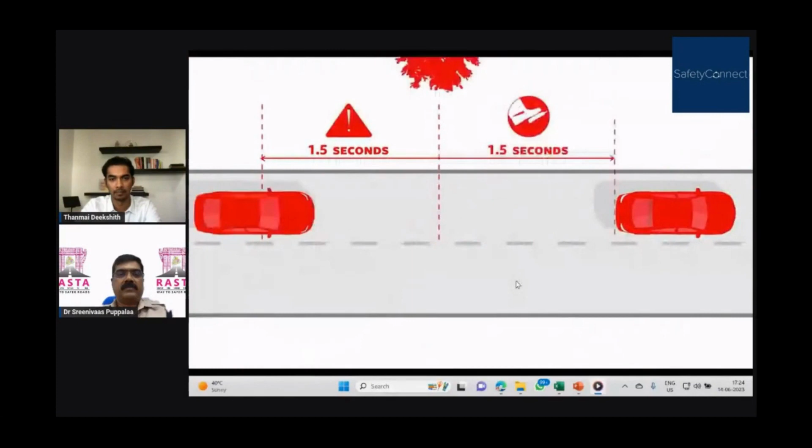It takes about 1.5 seconds to notice a potential risk in front of you, and another 1.5 seconds to react, hit the brakes, and slow down. So you want to give yourself at least 3 seconds between the car in front of you and your vehicle.

To measure, wait for the car ahead of you to pass a set object - a tree, road sign, light pole, any clear marker will do. After it passes, start counting: 1001, 1002, 1003. If you reach that same object before you reach 3, you're too close.

Of course, this 3-second baseline is right for a car in normal driving conditions. Driving in bad weather, add 1 more second. Driving an SUV, add another second. If you're driving a commercial vehicle, it's got to be at least 6 seconds. So don't forget the 3-second rule.

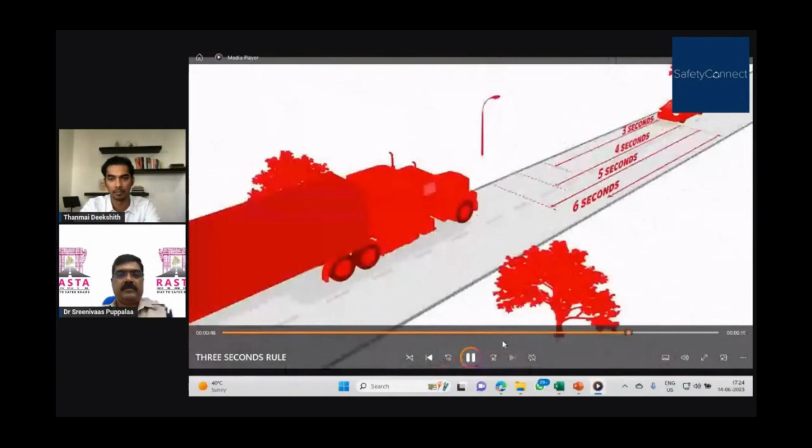Then safe distance. This is the most important slide in road safety. We have seen how to maintain the distance between the front vehicle and our vehicle, and in this you see how a driver has to concentrate on the driving.

Suppose you are driving a car at 100 kilometers per hour, and suddenly you see a person or pedestrian on the road. What comes into your mind? Just think. Somebody may think we need to apply the brake. Somebody might think we have to horn.

Not that. First, what comes to mind is that you have to stop the vehicle before him. But only when you are alert can you do that. First, what is your action? First you remove your foot from the accelerator and keep it on the brake. This takes 1 to 1.5 seconds for a normal person. It is called thinking time, and the distance traveled during this is called thinking distance.

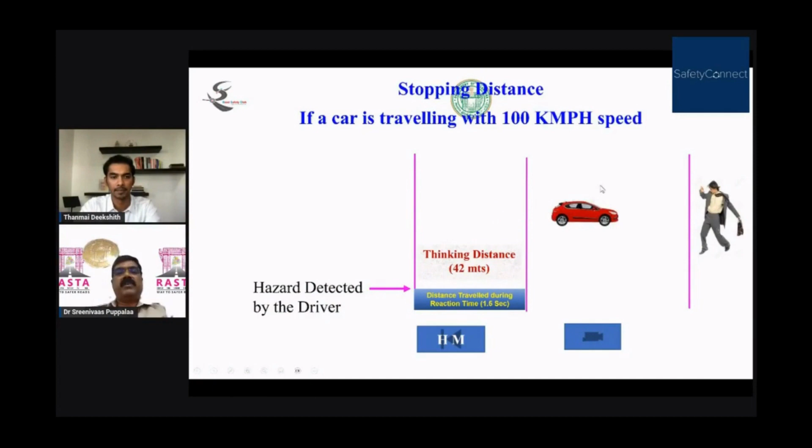Now you apply the brake. When you apply the brake, it won't stop suddenly, right? It travels some distance. That distance is called braking distance. At 100 kilometers per hour, it takes a minimum of 66 meters, as we also saw in the previous video.

That depends on the size of the vehicle, the road condition, and your brake condition. All these factors are considered. This is a normal car we have taken, assuming 100% braking efficiency and a normal tar road. So it needs around 108 meters distance to stop the vehicle without touching it.

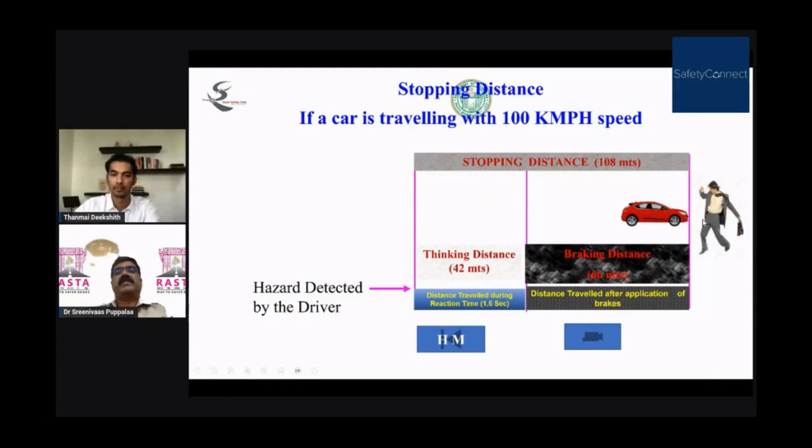We will see one video of what happens if suddenly a vehicle comes in front of a vehicle. Here you see suddenly this vehicle has come. There is no space to brake and stop this vehicle, right? So ultimately it has crushed the other vehicle that came in front of it suddenly. So that safe distance we have to observe.

In my opinion, there is no profession which needs this much attention. Can anybody tell if there is any profession that requires this much attention? Except driving, no other profession, because every fraction of a second the scene on the road changes. Some vehicle comes, some vehicle overtakes you, some pedestrian comes, sometimes an animal comes. Every second the scene changes.

We see how the behavior is on the roads.

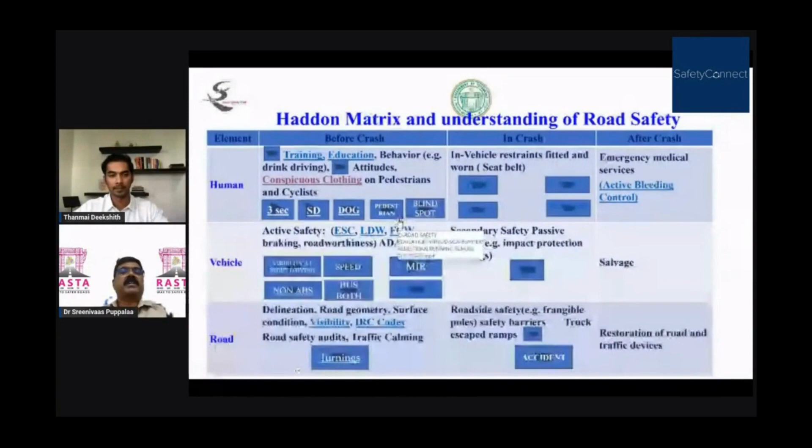Here, what we observed is the careless attitude of the pedestrian. As a defensive driver, when approaching a nearby village, town, or any place where pedestrians are supposed to cross or are moving around, he has to reduce speed and be ready to stop the vehicle. If he goes at a lesser speed, he can stop suddenly when needed.

So what you have to do is look over your shoulder for a fraction of a second. If you look over your shoulder, it will be visible. When you want to change lanes, give an indicator, wait for 5 seconds, then try to move slowly into the other lane after observing the side mirrors and over the shoulder. That is the safest way of changing lanes.

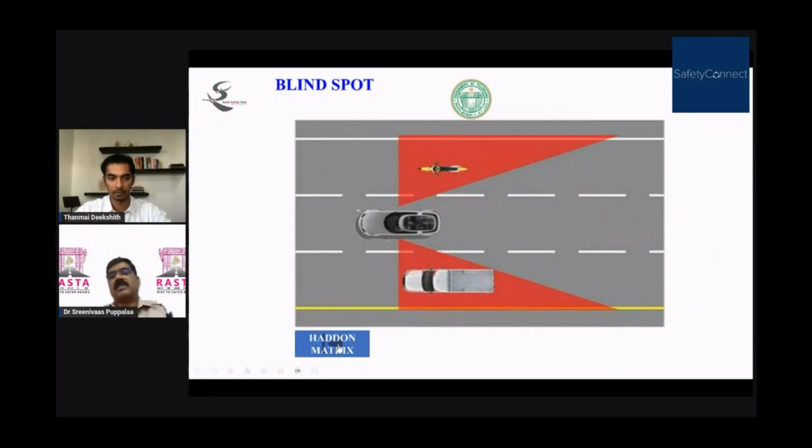These are the human sides. And vehicle side, ADAS, advanced driver assistance systems, which are helping to avoid the traffic crash. There are so many, right? Lane departure warning, then frontal collision warning, then electronic stability control.

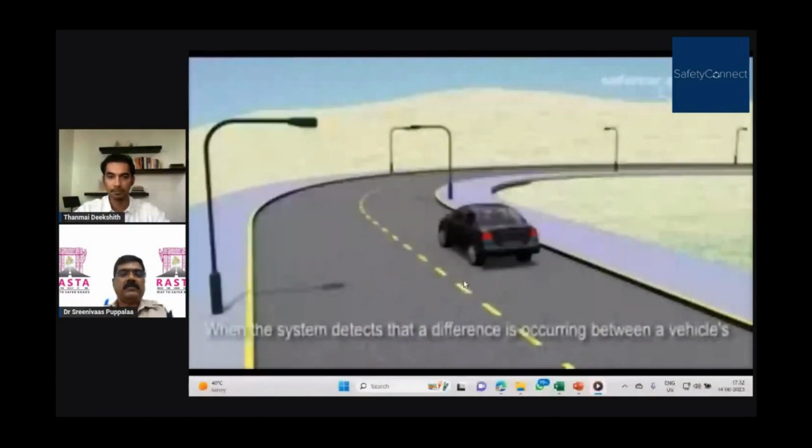These all help us. An electronic stability control system, commonly referred to as ESC, helps the driver maintain control of a vehicle during extreme maneuvers. When the system detects a difference occurring between a vehicle's motion and the driver's input, it activates preventative measures that keep the vehicle moving in the intended direction.

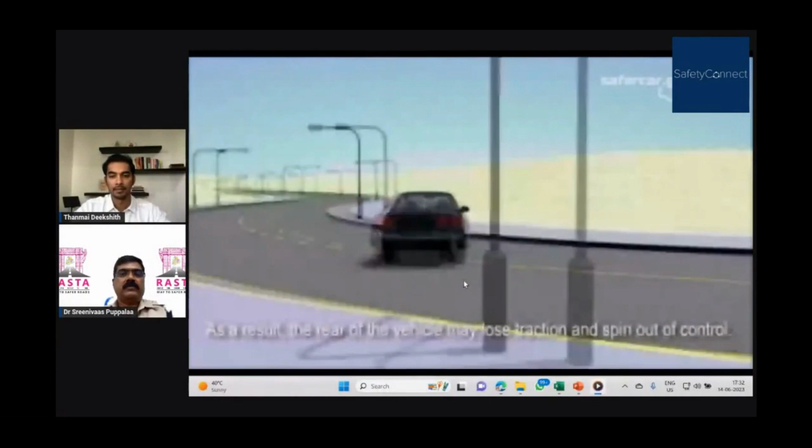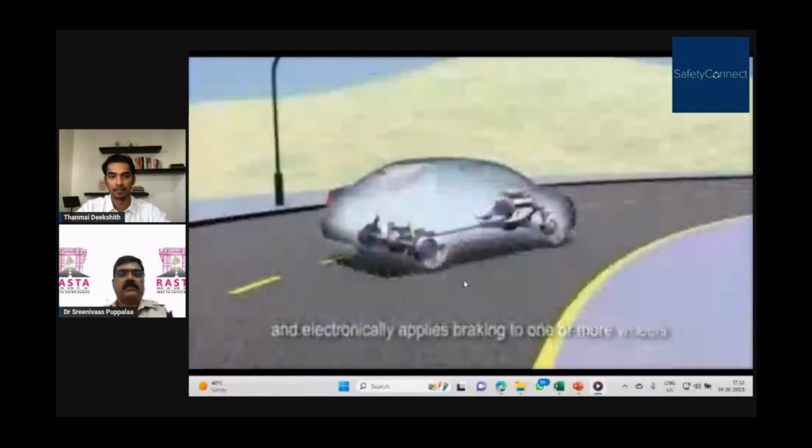Here's how it works. A spin-out occurs when a driver steers a vehicle too much in a direction for the speed of the vehicle. As a result, the rear of the vehicle may lose traction and spin out of control. Electronic stability control recognizes the problem and electronically applies braking to one or more wheels, in this case the outer front wheel, to counteract the oversteer.

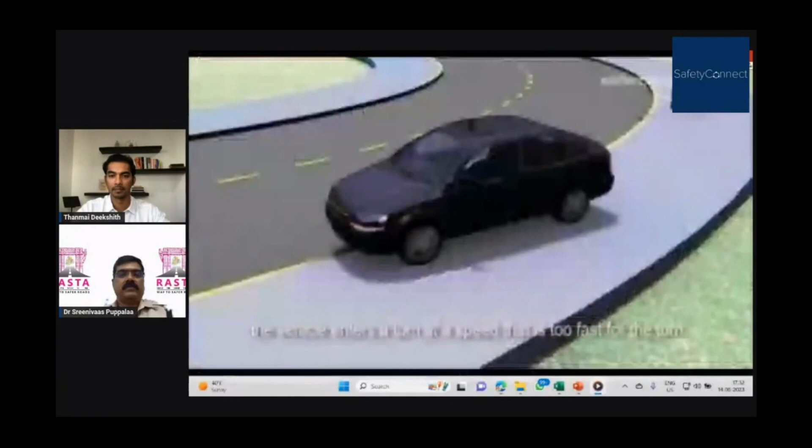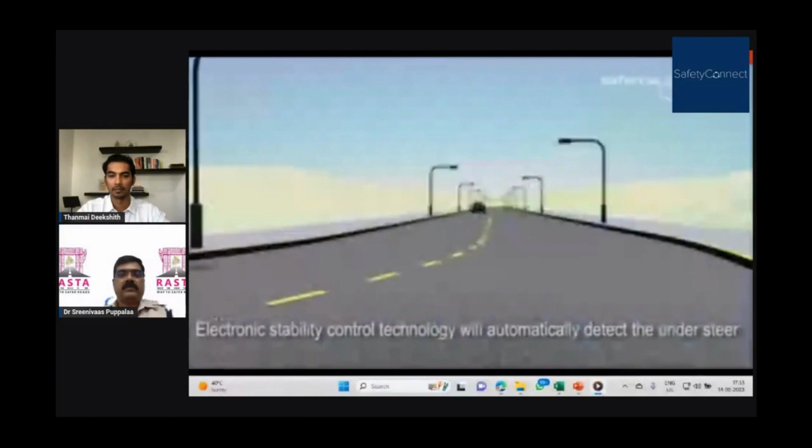During an understeering or plow-out event, the vehicle enters a turn at a speed too fast for the turn. This results in the vehicle losing traction and not being able to make the turn. Electronic stability control will automatically detect the understeer and apply braking to one or more wheels, in this case the rear wheel, to counteract it.

You might have observed understeer and oversteer here. Understeer means steering less than the amount required to negotiate the curve at the vehicle's speed, while oversteer means steering more than required. Both conditions are prone to road traffic crashes - you will go out of the road and lose control. To avoid that, electronic stability control will take care of it.

And similarly, lane departure warning: suppose you have fatigue and are feeling sleepy and the vehicle is going out of the lane, then automatically it will come back into the lane. And frontal collision warning: suppose you are going too close to the front vehicle, the brake will automatically get applied and the vehicle will slow down and maintain distance with the front vehicle.

All these features have come in the Mahindra XUV 700. I think most of you know it very well. Then ABS, anti-lock braking system.

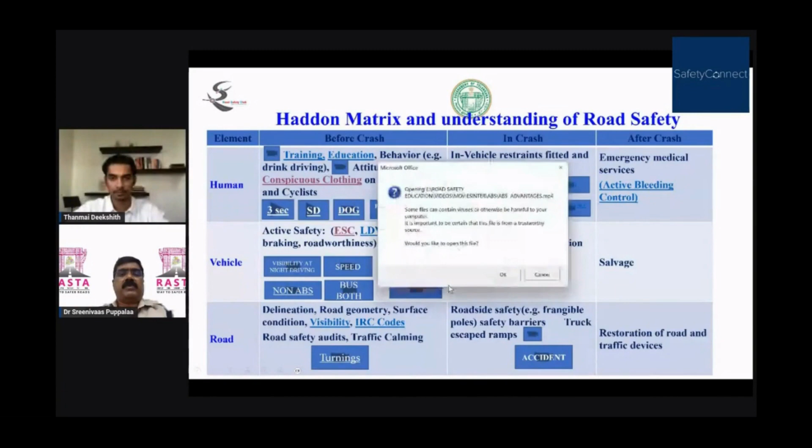How does it work? We'll see. Let's have a look at the ABS benefits in practice. Full braking at 100 kilometers per hour.

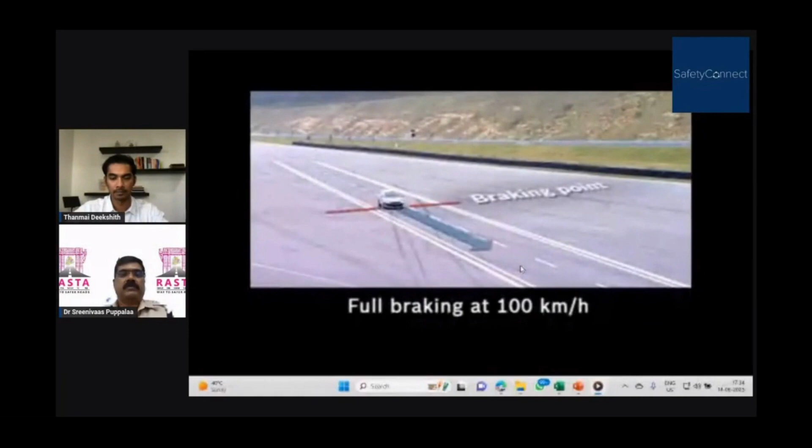You see, when you apply brake, suddenly the wheel gets locked completely, so there is no rotation. When there is no rotation of the wheels, front and back, the vehicle cannot be steered. When rotation is there, only then can the vehicle be steered in any direction.

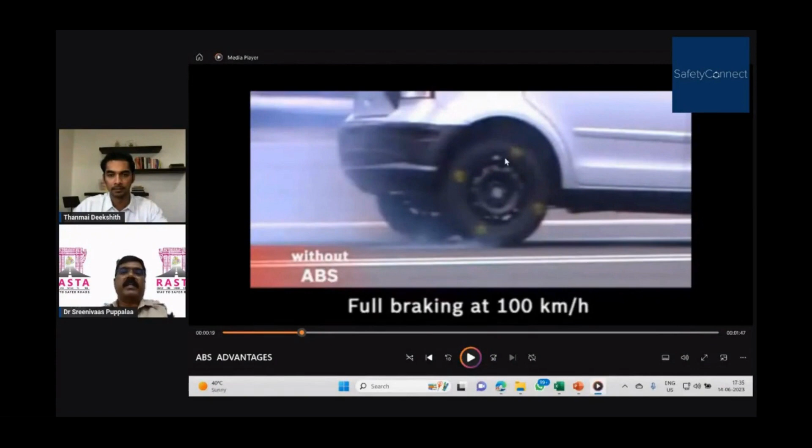So what happens is the anti-lock braking system senses the locking of the wheel and automatically releases the brakes so the wheels rotate and you can steer in the direction. That's the function of the anti-lock braking system. With ABS, the braking distance is significantly shorter and the vehicle remains stable.

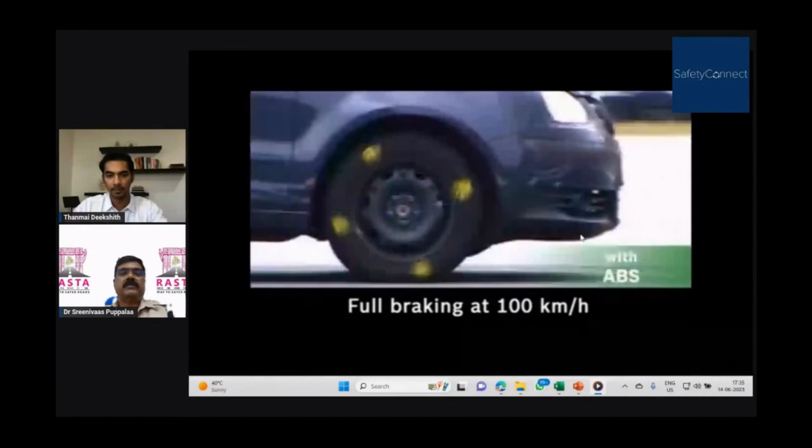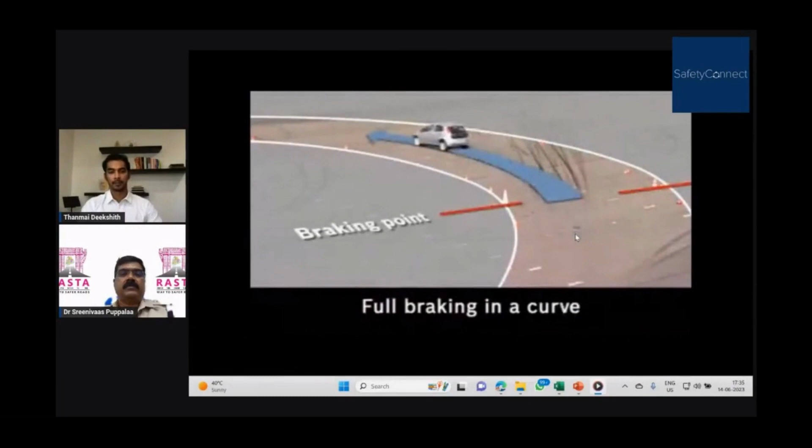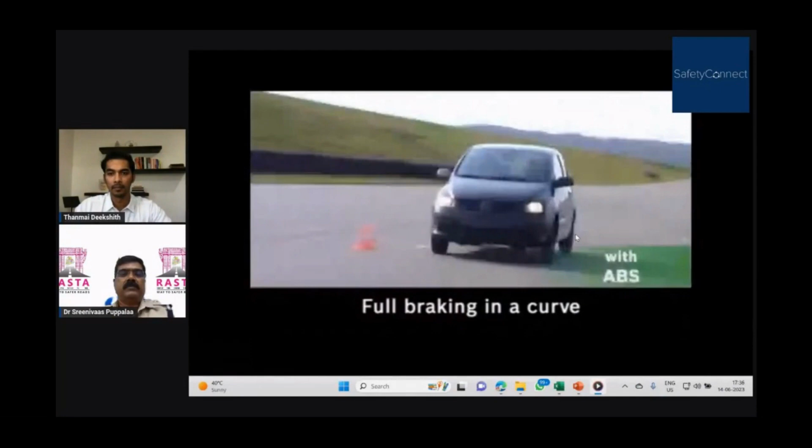Full braking in a curve. Without ABS, should the wheels lock while applying full brakes along a curve, the vehicle can no longer be steered and slips out of the curve. With ABS, you have the vehicle under control and can steer systematically.

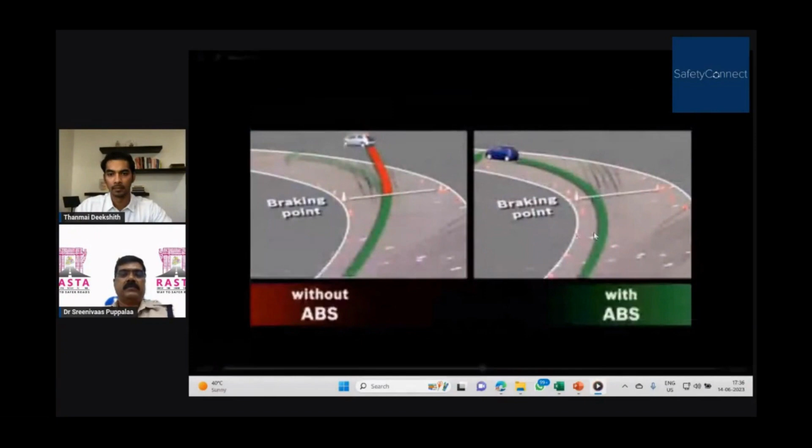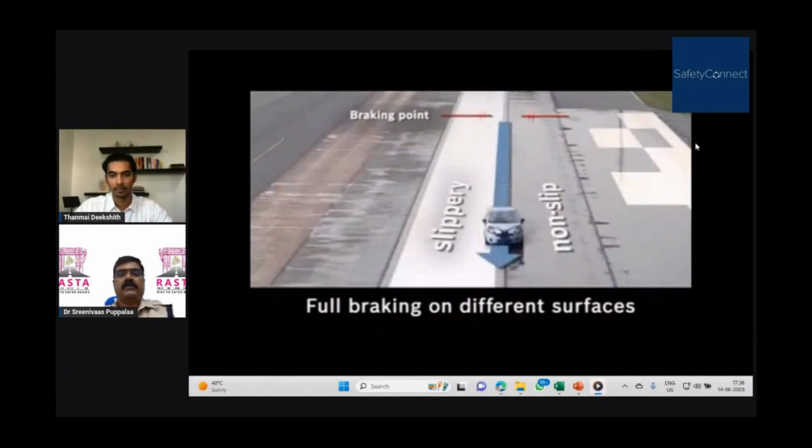Full braking on different surfaces. Traction on lanes may vary due to volatile weather, dirt, and foliage. When fully applying brakes without ABS, the vehicle can quickly become unstable. With ABS, the vehicle remains stable even in this situation, with an optimal braking distance.

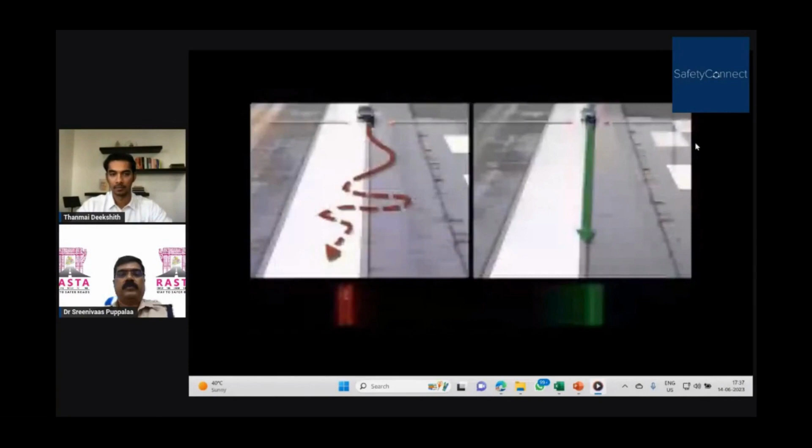Thanmai, is it audible and visible? Hello? Yes, hello, yes, we can. Yeah, yes, thank you.

Now we have seen about ABS. Now in India, ABS is compulsory for all vehicles, and even for motorcycles it has been made compulsory.

Then, misuse of the provisions available in the motor vehicle - you see, rear view mirrors are provided to see the traffic following us or beside us, but some people use the mirrors to see their own face. This causes distraction to the rider, and also they can't see the traffic beside them or following them. So anything may happen - we should be careful.

Then on the vehicle side, all this technology is improving so that we can avoid road crashes. On the road side, we have different IRC codes - IRC means Indian Road Congress codes - covering how we lay the roads, the guidelines and standards to be maintained in road laying, road safety audits, road geometry, etc., which play a major role on the roads.

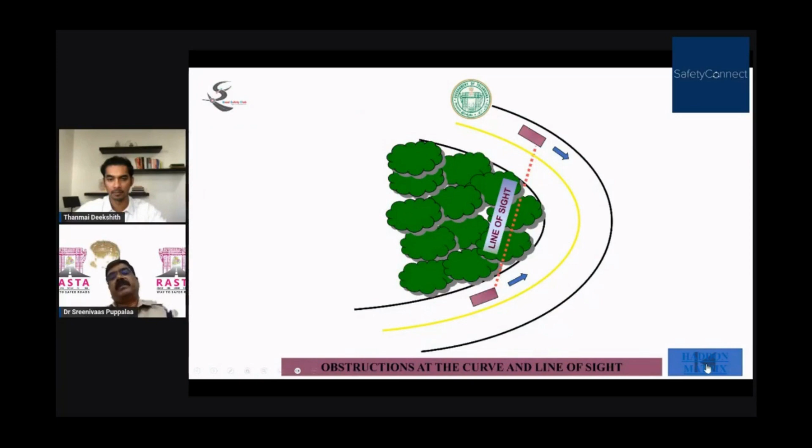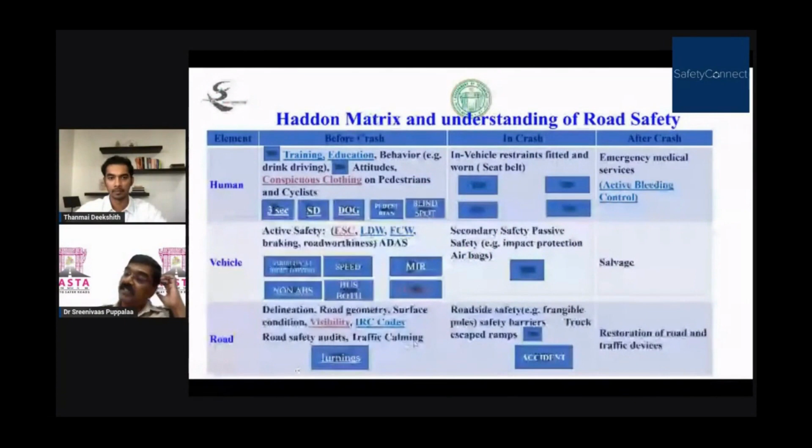Then roadside, all roads should have road safety audits conducted if there is any accident spot. Traffic calming means the slowing down of traffic with road construction, like speed breakers, but not only speed breakers to reduce the speed. There are many other types of constructional designs to slow down the traffic. Those methods can also be used where traffic slow down is required.

So we have taken all the precautions before a crash to avoid a road traffic crash. But unfortunately, if a crash happens, what we have to plan is that the injury should be very less, and there should not be a loss of life.

For motorcycles, what we have to do is wear a helmet.

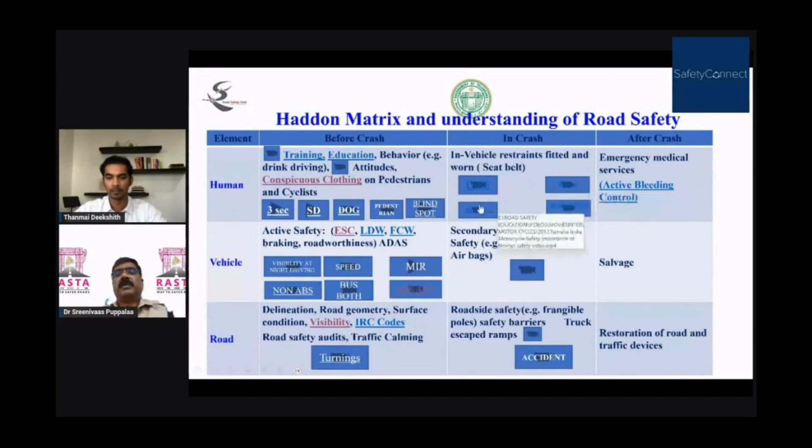How does a helmet protect a rider from serious injury in an accident? Let's take a look at the construction of a helmet.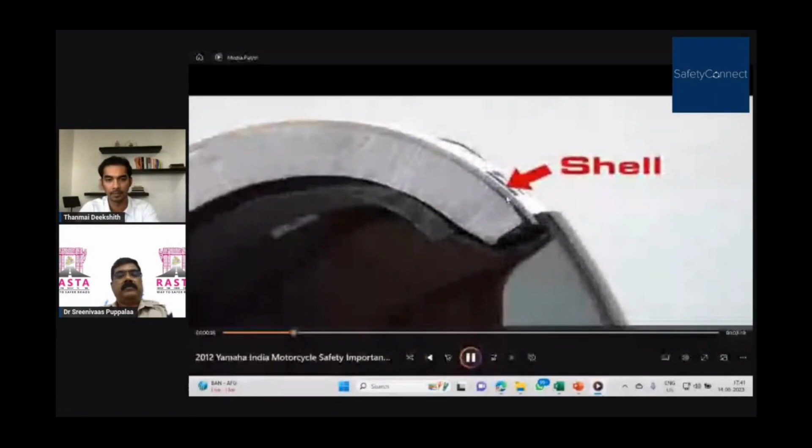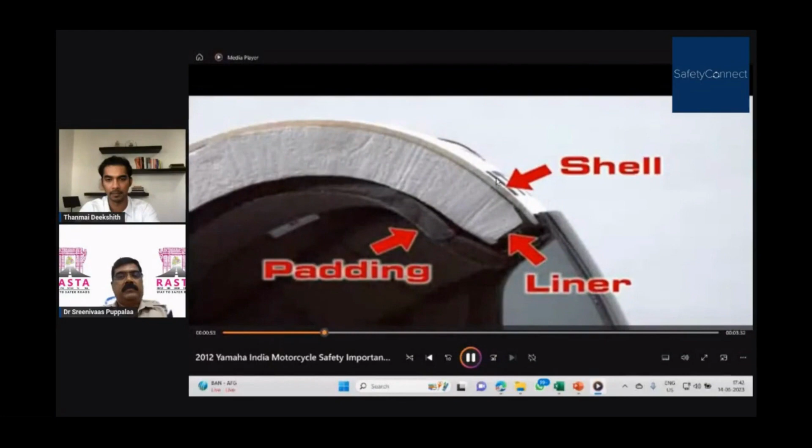The hard outer cover is called the shell. The inside is comprised of an impact-absorbing styrofoam liner and interior padding. The shell has the important job of protecting the rider's skull and scalp from injury. But protecting the skull and scalp does not necessarily save a rider's life. The skull contains the brain, the most important of organs.

The brain is very delicate. A strong impact can injure the brain, even though it was not damaged directly. Let's see how this can happen in a test.

Take a plastic container full of material as soft as the brain and drop it. The plastic container is undamaged, yet the material inside has been smashed. This is how the brain can be injured, even though the skull and scalp are undamaged.

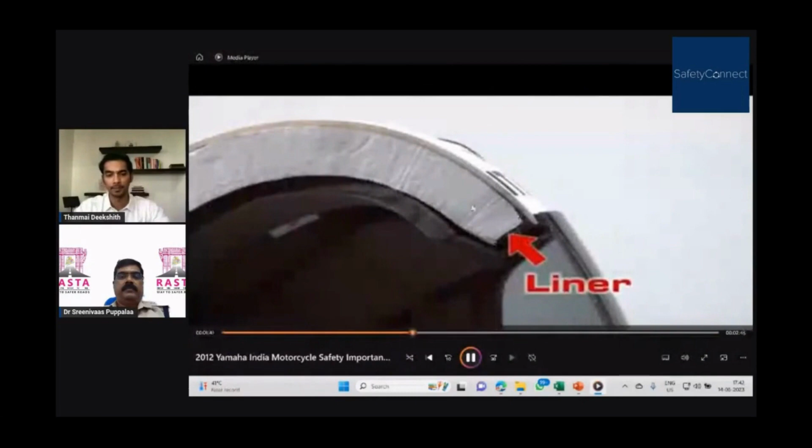The helmet uses its impact-absorbing styrofoam liner to protect the brain. Let's see how this liner works. Think of this egg as your head.

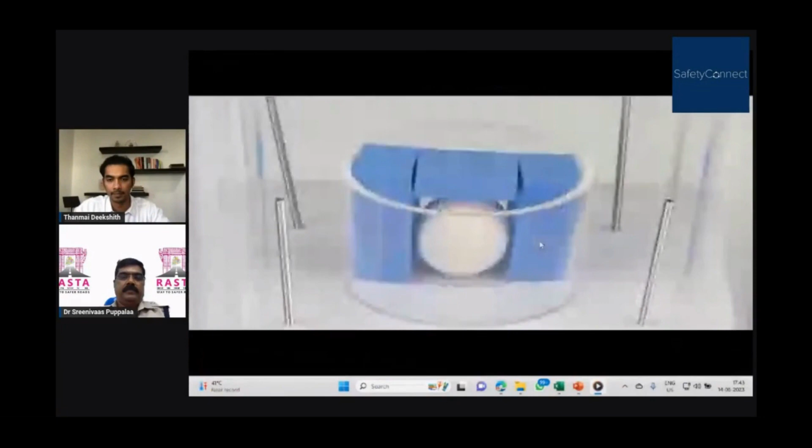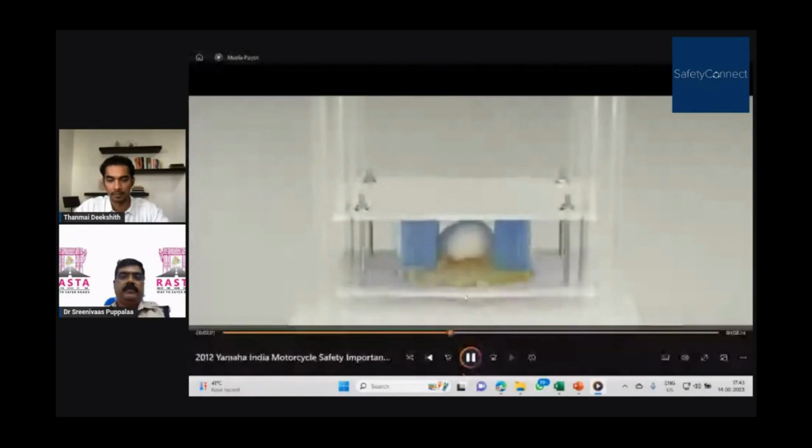First, let's place the egg in a container so that it is in direct contact with the container bottom, and put a lid on it. Drop the container from shoulder level, and you will find the egg has broken. You see, the egg is having life, right? We know, if it is hatched, it will give life, but it lost its life.

Repeat the experiment, but this time put a styrofoam pad under the egg and drop it from the same height. The egg remains unbroken, even if the styrofoam pad has been slightly dented.

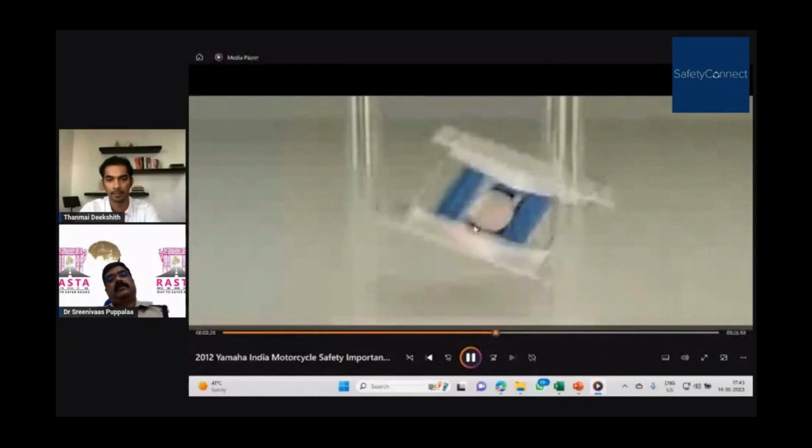The dent may appear minor, but in fact, in that instant of less than 1/100th of a second when the impact occurred, the styrofoam absorbed the impact force, saving the egg from damage. This demonstrates the incredible protective power of a helmet's liner.

But now that the styrofoam has absorbed one impact, will it be able to protect the egg again? This time the egg broke. This is because the first impact compromised the structural integrity of the styrofoam.

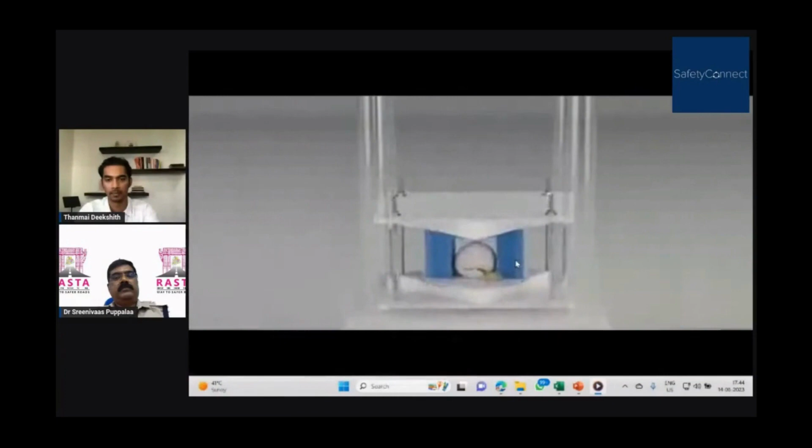Likewise, once a helmet suffers a strong impact, the styrofoam liner will be weakened, even if the outward appearance of the helmet and liner appear normal. Imagine what could happen to you if you use a helmet that looks okay, but has actually suffered impact damage.

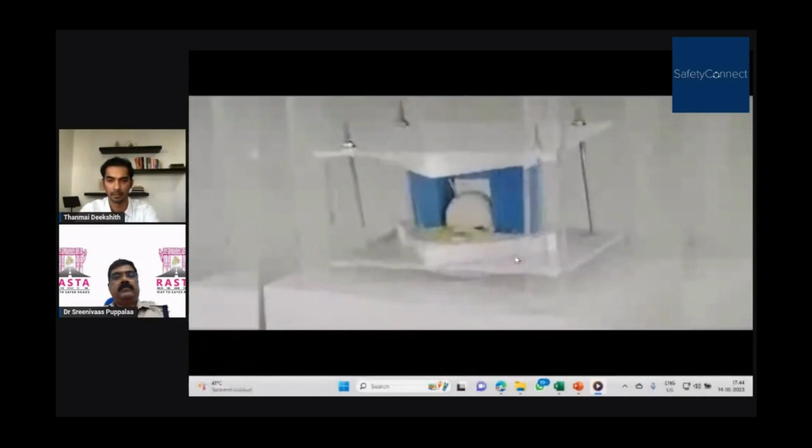Also, make sure your chin strap is fastened securely. If it isn't, your helmet may be thrown off during a collision or a fall. Once again, please be sure to wear a helmet and have your chin strap fastened firmly whenever you ride.